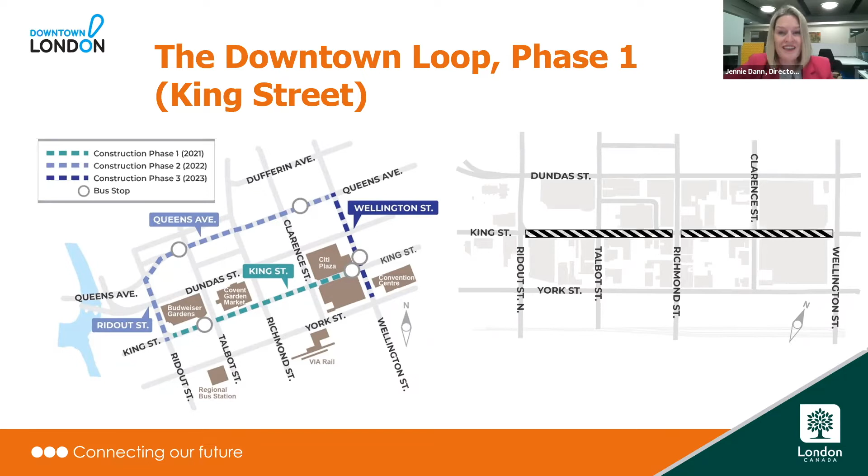The eastern portion of Phase 1 on King Street involves sewer separation work. I think our next slide has some images to help describe that. So what we'll be doing is completing this work between Richmond and Wellington Streets.

It's really important underground work that involves removing century-old combined sewers. That means both the storm and the sanitary sewer are in one pipe, and we'll be separating them into a modern sewer system. Last year, the city completed a significant portion of this downtown sewer work through the Richmond Infrastructure Renewal Project, and this is really a continuation of that effort.

With the intensification happening in the core, this is really important work to get out of the way as quickly as possible. This work will result in a healthier Thames River, increased capacity for development, a reliable sewer system, and an improved streetscape when we've put everything back together.

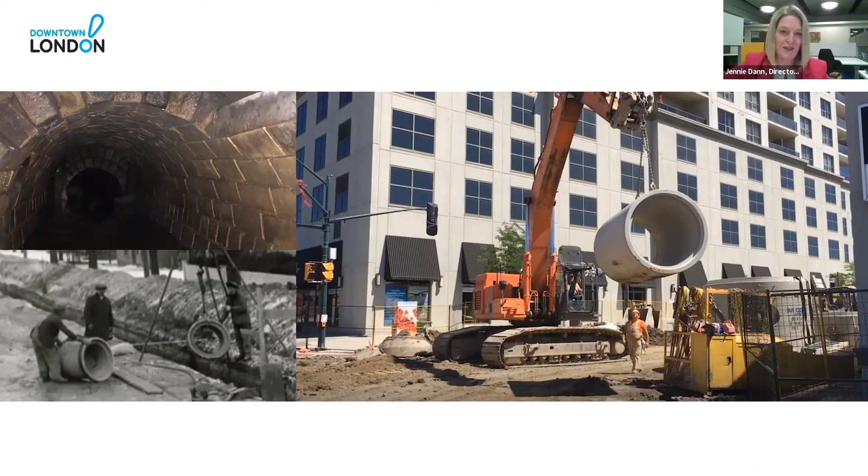This is certainly a major project, and we have put together a great team that will be dedicated to ensuring it runs as smoothly as possible for you. I'll highlight some of the key players who will be involved in this work.

First off, I'd like to welcome our contractor, L82, who will be building the project. Brandon Shaw from L82 is with us today, and I'll ask him to introduce himself and say a few words to you.

Thanks, Jennie. My name is Brandon Shaw, and I will be the project manager for L82 Construction, the contractor on this project. As some of you are aware, we completed the Richmond Street project last year, which involved similar work with the sewer separation. In addition to that, L82 has over 35 years of construction experience in and around the London area. We're well versed with the downtown area, safety, pedestrians, access, all that kind of stuff.

As everyone's aware, COVID is now another problem that we have to deal with. LAD2 has implemented their own COVID-19 policy, which we've shared with the City of London. Things went well last year, and hopefully we can have another successful project this year.

Great, thanks, Brandon. I want to next touch briefly on what the city's core construction program is all about. Before 2018, this program didn't exist. It arose out of an understanding that major work in the core requires heightened attention and collaboration.

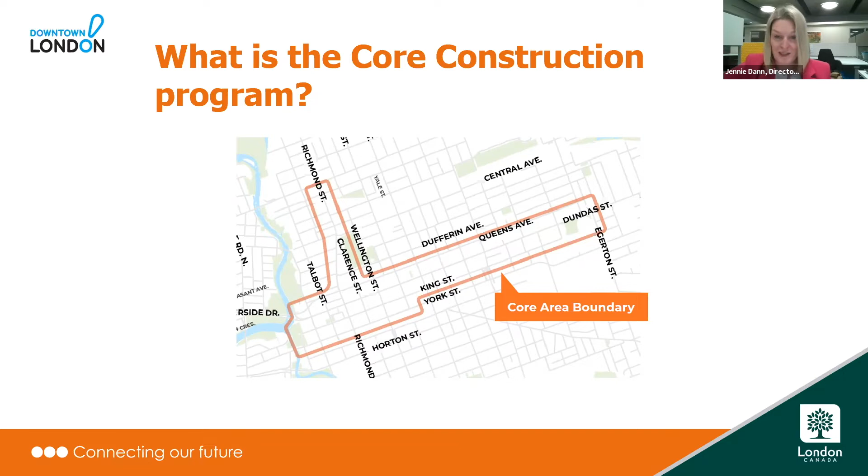In Jaden's previous role with the city as a subdivision ambassador, he has a great deal of relatable experience acting as a liaison between the city and the people that we serve. So we're incredibly grateful for everything that Jim has done, and we look forward to working with Jaden. So I'll now introduce Jaden to introduce himself and say a few words.

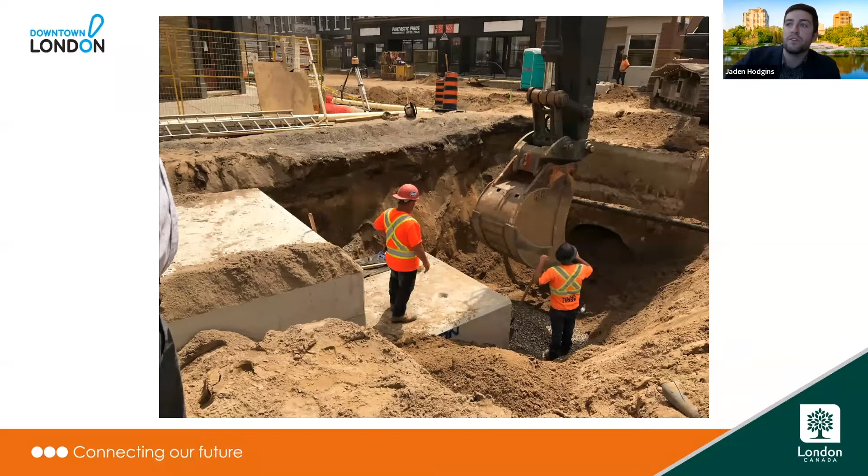I'll give a bit of a construction overview. Work is scheduled to start April 5th. It's anticipated that construction will continue until December 2021, with limited carryover work into spring 2022.

We recognize that more residents may be disrupted by construction noise during COVID-19. Normal working hours will be 7 a.m. to 6 p.m., Monday through Friday. Currently there's no planned night work or weekend work, but the contractor may adjust these hours as needed to take advantage of weather or to catch up on the schedule.

A multi-stage approach will be used to balance efficient construction with transportation impacts, and the schedule takes into account expected average weather conditions and known above and underground site conditions.

Now I'll walk you through the staging of this project. Construction will be split up into the following stages in order to minimize construction impacts. Stage 1A is Talbot Street to Richmond Street. Stage 1B, Ridout Street to Talbot Street. Stage 2A, Richmond Street to Clarence Street. Stage 2B is the Clarence Street intersection.

Stage 3A is east of Clarence to the Citi Plaza parking garage exit, and stage 3B is east of the Citi Plaza parking garage exit to Wellington Street. We have traffic management plans in place to provide alternate routes for vehicles, transit, and cyclists, which you'll see in the next slides.

Construction's planned to commence in April in stages 1A and 2A at the same time. Then we'll be proceeding to stages to the west and east, which I'll show you next. What's important to remember is that the portion from Ridout to Richmond, at stages 1A and 1B, will be maintaining one lane of traffic and loading areas where possible, with short duration closures occurring as required for construction.

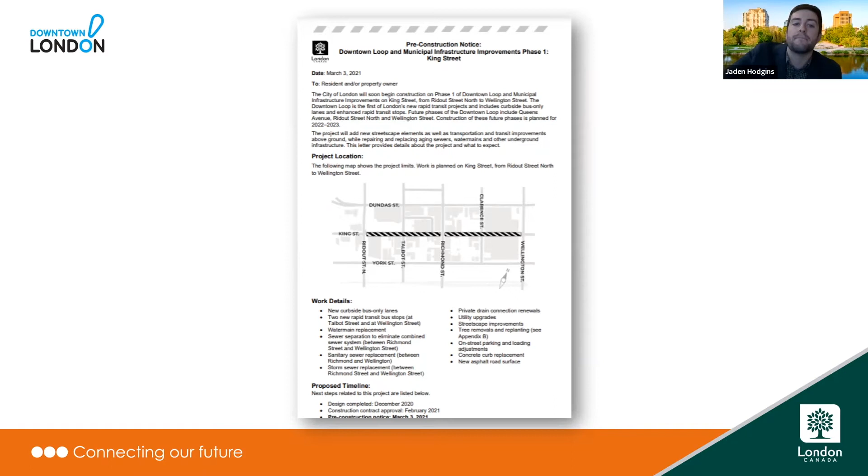Just to touch on some of the COVID-19 precautions, as we progress into construction, I'm sure there'll be a lot of questions about what's happening and where we are with things. The contractor, L82, needs to remain focused on managing their crew and subcontractors, so if you have any questions, please contact me or Jeff rather than the contractor. I'll flag that this is especially important during COVID-19, as we want to make sure we're keeping everyone safe. So contact me rather than tapping on the shoulder of someone at L82, and I'll be happy to answer your questions.

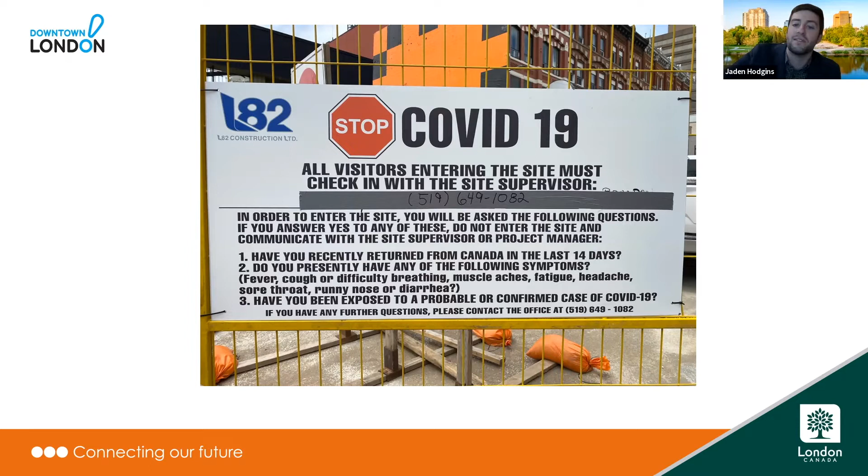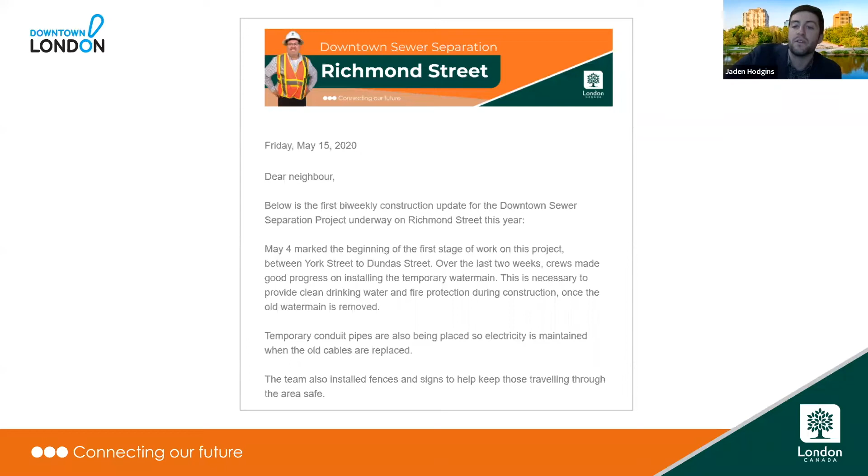Now I'm going to hand it back to Jeff, who's going to take you through some of the things we've learned and adapted and will be applying to this project.

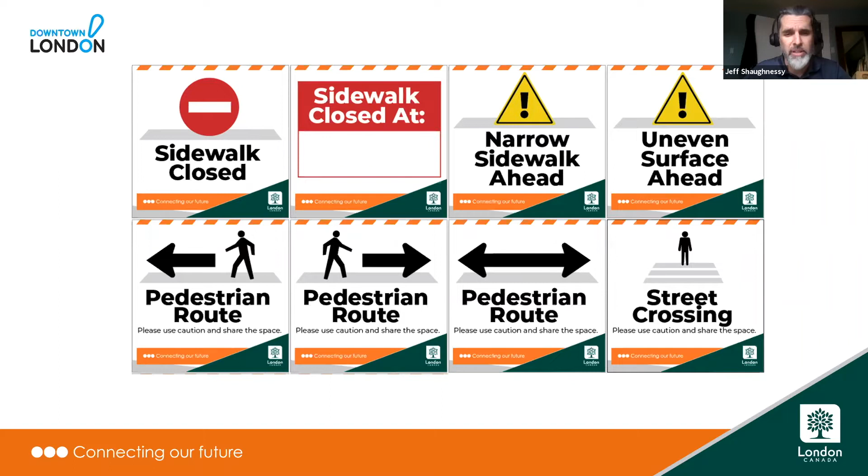We also know that site safety is of the utmost concern. As you are all aware, there are a number of social issues that impact the core, and there are instances in which people who may be suffering mental health or addiction issues could be in distress or having issues that can't be resolved on the spot. We have a coordinated, informed response team available to assist, and you will hear a bit more about that later as well.

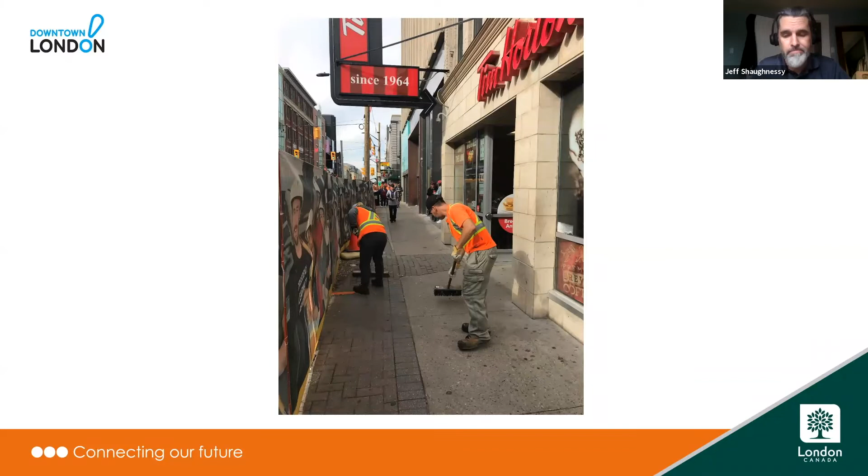We also know there is a huge desire for free parking and other incentives for core area visitors. Parking can get disrupted by construction, and people want to know where to send their customers. So we'll also talk a bit more about that shortly.

We know that there is a need for some special construction-related temporary parking and loading areas. Construction causes dislocations of where people can usually pull up curbside to drop something off quickly, pick something up, or pick somebody up from a store. So we will also talk about that a little bit more later.

There are going to be interruptions. It's important to set that expectation. There are two types of interruptions: planned interruptions, and then there's the unfortunate kind of unplanned interruptions.

Planned interruptions are what we know we have to do in sequence for the project, and we try to let you know as soon as we possibly can. For example, we can't know weeks in advance when the water needs to be turned off, but we typically know at least 48 hours in advance, so we'll be sure to pass that on. Our contractor will put a notice on the main entrance of each business that's affected, and we follow up with each contact on our email list here at the city to confirm receipt of the notice.

For many of you, these service interruptions can be dealt with easily enough when you have advance notice. For others, you may have specific issues related to these interruptions. Do reach out to us if that's the case, and we may be able to help.

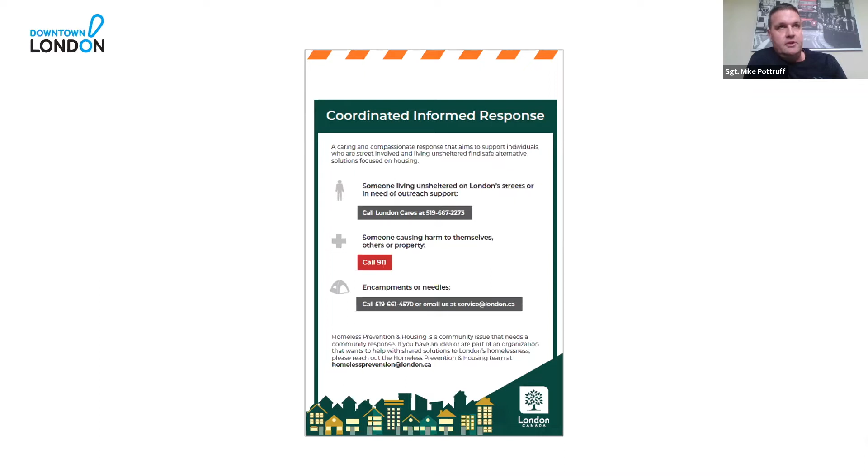A typical foot patrol call - Jeff touched on it a little bit earlier - we'll deal with thefts, maybe if the suspect is still on premises or already gone. We'll deal with trouble with persons calls, quite often trespassing issues, vagrancy issues, which we're seeing a lot in the core right now. Like Jeff said, somebody under the influence of a possible narcotic or alcohol, we deal with that, and someone experiencing mental health issues, we certainly deal with that as well.

You're going to hear from Debbie Kramers from CIR. We work closely with their group to help us out with individuals that maybe aren't committing criminal acts but are downtown and causing us a bit of grief.

For the businesses out there, we do have crime prevention officers whose sole job is crime prevention, and we're more than happy to have them come out and speak to your businesses and offer some crime prevention tips and hardening your business. Things we've recently seen with the project we're running include businesses leaving valuables in front windows, or having cash registers still in the business and on display, possibly with money in them. That's just a lure that a lot of people sometimes can't prevent themselves from breaking in for.

So we encourage that kind of thing, and certainly our crime prevention officers, Constable Carl Noel and Constable Kathy Found, are more than happy to come out and we will do an audit free of charge. I believe that's all I wanted to touch on, Jeff.

Okay, that's great. Thank you very much, Mike. As Sergeant Pottruff mentioned, London Police Services works closely with the city's Coordinated Informed Response team on many social issues in the core when there is a need for intervention. Debbie Kramers is our Coordinated Informed Response manager for homeless prevention, and is here today to tell you a bit more about the program.

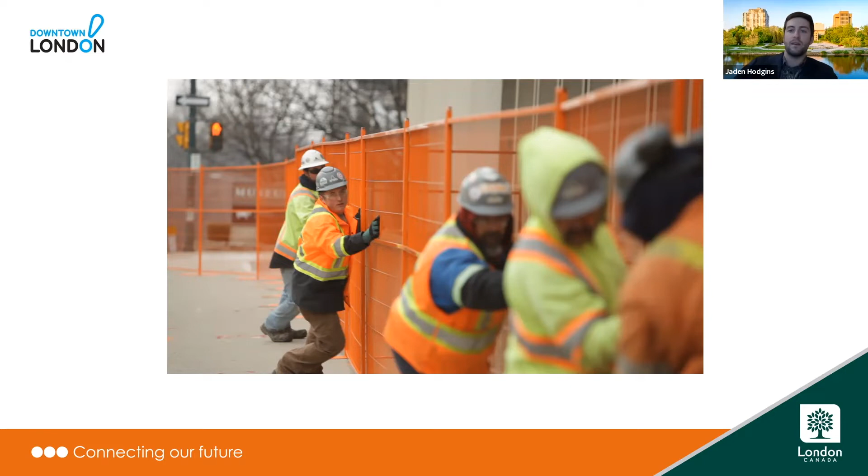Getting into site cleanliness, we recognize that through our past experiences, garbage collection is always a bit of an issue and something that we're paying close attention to. For garbage collection during the project, typically we would ask that properties have their garbage placed out early in the morning, before 7 a.m. if possible.

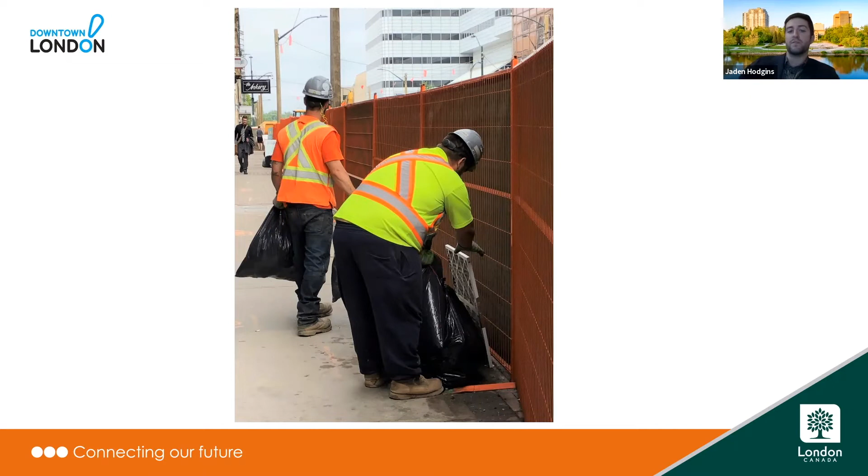Businesses using private garbage collection services will continue as is unless construction requires temporary alternative arrangements to be made. So if you're currently using a private garbage collection service, please make me aware so we can coordinate this. And garbage bins for the public will be available just outside of the construction zone.

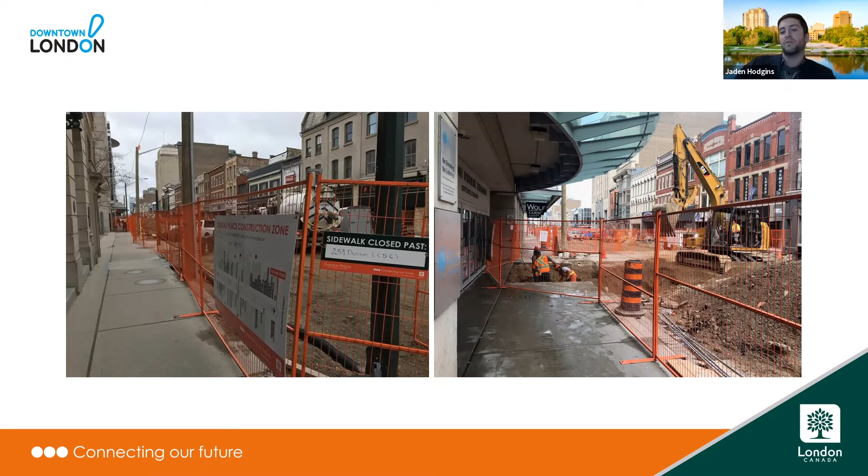Here you can see some of the signs that Jeff showed you earlier in action. We've made these signs larger as well so that they're easier to read. And we also have some COVID-related signage up now to reflect the guidance of our local public health unit.

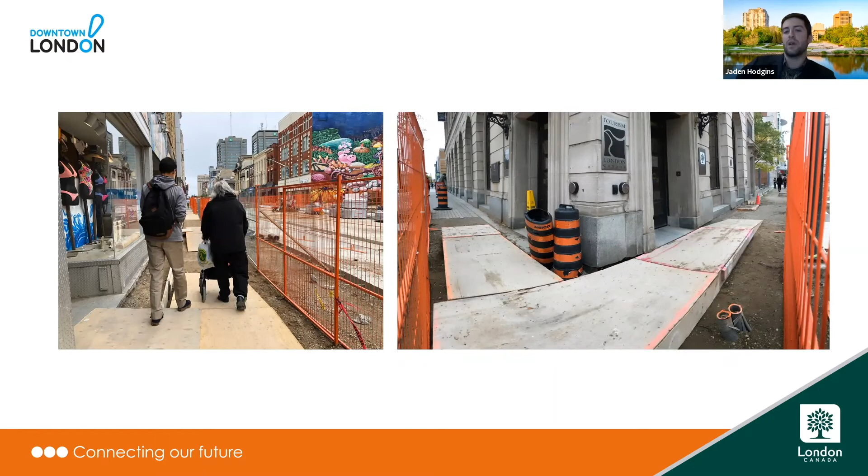Here you can see an example of some of the temporary ramps we've had to use on some of our projects. We do have situations where we can't provide a level or hard surface, so we'll provide temporary ramps just to allow access for people with mobility issues to all the storefronts.

And we want to make you aware that you do have an ability to report an issue you see in the construction zone to the city through our website, through our Service London portal. This gets directed over to our group. So if you don't feel comfortable making a phone call or emailing me directly, you can submit it through the city's website this way.

Thank you very much for that, Jaden. Your slides are a bit of a segue for our next section on accessibility. Melanie Stone is the city's accessibility specialist. There are lots of people in our community who, due to age, infirmity, and injury, whatever it may be, have mobility challenges, and for them, a construction zone presents lots of unexpected terrain and obstacles. We are always trying to be more attentive to what we can do to improve things on our construction sites.

Good evening, everyone. Whenever we have construction, we have significant disruption, which can affect people with a variety of disabilities going through the area. We often talk a lot about physical disability, and that is, of course, very important to focus on. But there are a lot of distractions in construction zones and a disruption of pedestrian sidewalks that impact people with a variety of disabilities, including cognitive, intellectual, and sensory disabilities. And we have learned quite a bit over many construction projects about how to be responsive, thoughtful, careful, and as inclusive as possible through these construction sites.

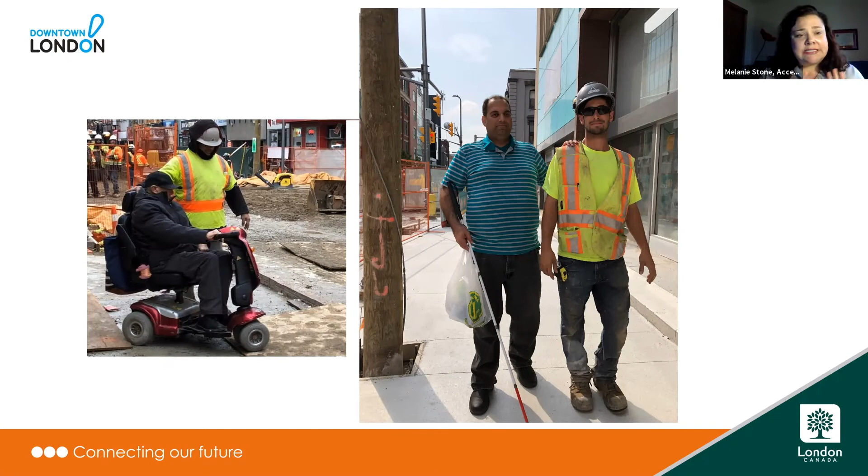I do want to give you a little tip, if you can go to the next slide. One of the things that happens in a construction zone is that people who regularly rely on large signage are pushed a little bit closer to businesses.

So they can't see the sign for your business as clearly. It's often important to put a sign with your contact information, address, or any information people need to navigate to that spot in the window of your business. It really helps, and to put it at a place where somebody seated in a wheelchair can actually see it and engage with it.

I can always be reached at accessibility@london.ca, but the best way to navigate quickly is through Jaden and Jeff, and they'll be in touch with me as well. We need to support each other through this, and I'm happy to be in touch with anyone who wants to problem solve some issues. We need to be on the lookout for one another, for anyone who is becoming disoriented, frustrated, confused, or stuck in a construction site. We all need to help each other.

The city is committed to accessibility, and we will be continuing to work throughout this project to make sure that every access is maintained. We're looking forward to the inclusive conclusion where everything is much more accessible. We just have some short-term difficulties to navigate through. So thank you very much.

Thank you very much, Melanie. Very informative and helpful. One of our goals is to make it as easy as possible for your customers to reach you, and we recognize construction displaces parking.

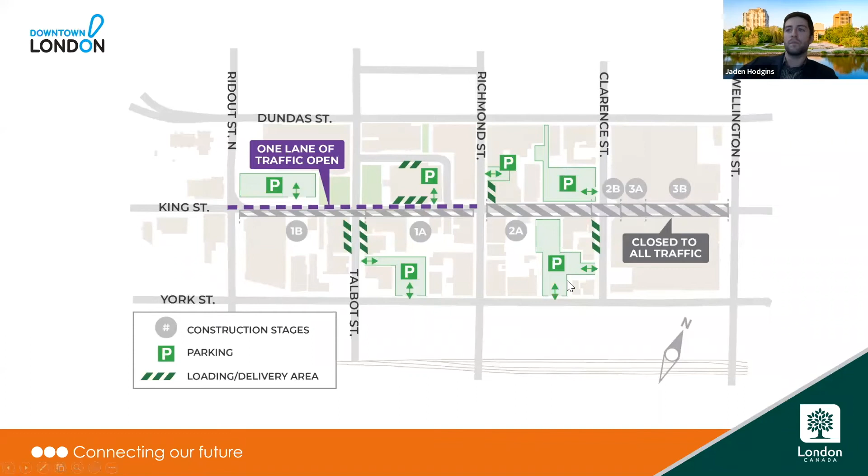So we've just shared with you a whole slew of practical considerations that we'll be applying to this project. Another key part of mitigating construction impacts is communications. Through targeted and strategic communications plans, we're going to be letting London know that King Street and the surrounding area is open for business during construction. That's a really big priority of ours. Colleen Gyori from Downtown London and I will be working together on this, and we're just going to take a couple of minutes to walk you through some of these plans.

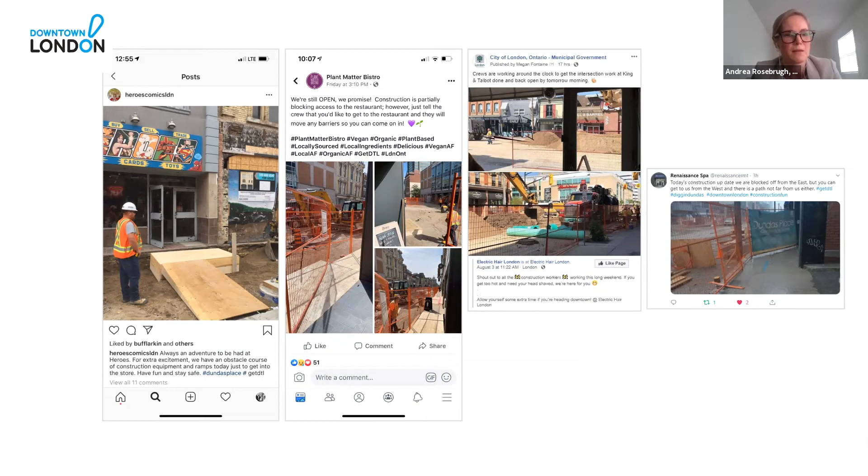Colleen, did you want to add anything here? Yeah, just a really important note that when the construction fences are up, it can be more difficult for customers to see your open sign and know that you're out there, you're open, you're ready for business. So your digital presence is more important than ever during these times. You could post little videos showing how to get there, navigating the construction zone, some fun, bright signage lower down to indicate that you are open and people can see how to get to you. I really encourage you to do those things and stay connected with your customers so that they know construction does not mean businesses are closed during that time. You're here, you're ready. And of course, the BIA will be doing those things as well to help you out. But again, any extra ideas, if you need support enhancing your digital presence during this time, just reach out. We're here to help.

In addition to social media, we'll be looking into different advertising opportunities. We'll be bringing back some of the fun signage to promote the area. We've seen lots of traction with that over the years, and we'll be looking for strategic locations to promote coming to the downtown. The only other thing I can add is that if you have any other ideas of how we can help folks navigate through the construction zone, any fun signage ideas, please reach out. We want you to feel represented in this marketing and in the signage. So if you have any fun ideas, let us know.

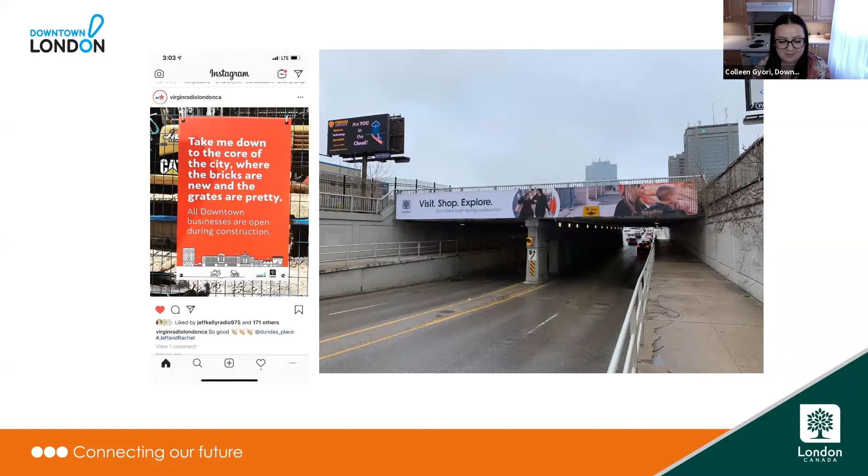Along the way, there will be lots of opportunities to get involved. In past years, we've had pop-up signage installations, and businesses have participated in radio ads with us. So keep those ideas flowing into the BIA, and we can all work together to make the space really

As Andrea mentioned, we are actually going to be visiting each of you in the construction zone. Barb is going to pop by and chat with you and drop these cards off. But if you're looking at them and you're not sure who to contact, just call the BIA. We'll either tell you who to talk to or we'll give them a call for you.

Another resource we introduced in the past two years is the construction toolkit. Some of you will be familiar with this. A digital copy will be available online at the start of the construction season, and we'll be giving hard copies out to the BIAs as well for them to distribute. This document really contains all the info you need about construction - info on the schedule, what the contractor will be doing on site in terms of garbage collection, site safety and cleanliness, and traffic management.

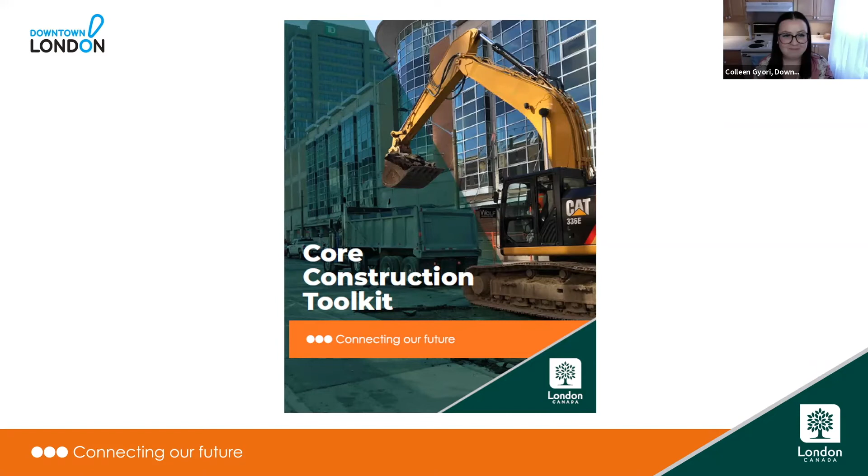Here's just some more of what you can see inside of the toolkit, to give you a sense of that. Just some reminders here of how to stay informed and engaged throughout the project. The Get Involved site is a page where you can find important project info and construction resources, including the last email updates from Jaden and Jeff - those will be linked on here. We'll also be supporting the BIA's social media efforts to promote the area, really just trying to amplify those messages.

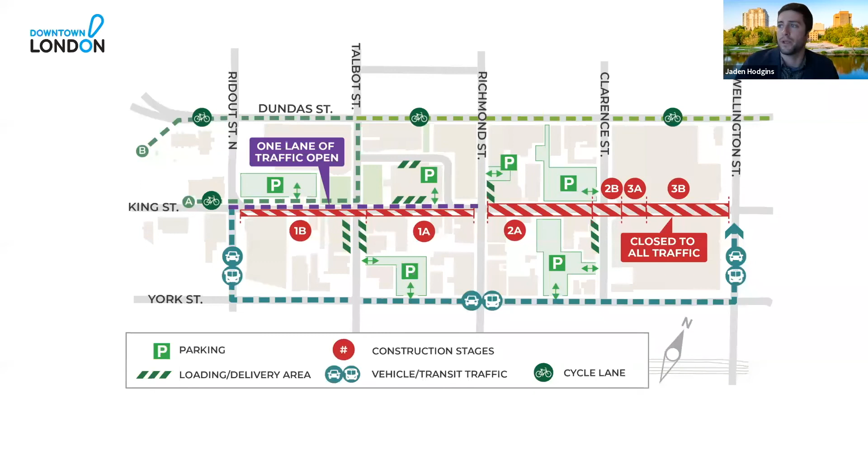Okay, sounds good. I'm going to pull that up. I also see a question about, can we also get a copy of this traffic parking map? Absolutely, we will circulate.

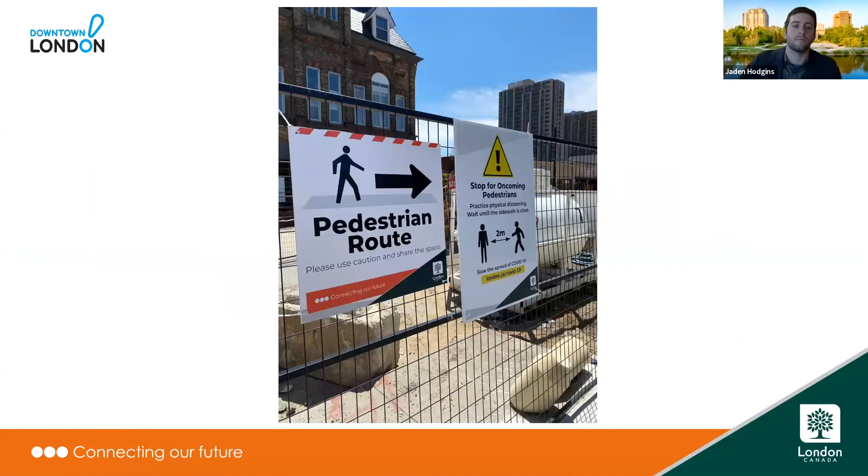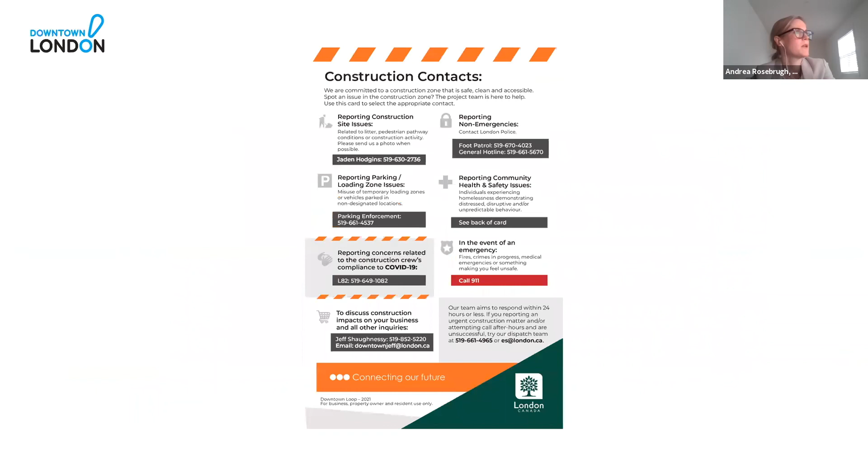I think we have a spot where we've got both of these. I may have gone past it. Sorry to flip these so quickly, but I'll just try to find where we've got both of them next to one another. There you go. Is this the one you're looking for, Jaden?

Yeah, I think it'd be great to get some print copies of those and get them out in business hands so they have that quick reference. Yeah, absolutely.

One of the things we've done in past on the Old East Village project, speaking to the point around the parking maps, they are helpful to be able to help folks navigate to find you. So we provided electronic copies of those for businesses to be able to identify their specific business, like 'we are here.' That's something we can offer if that's helpful at any point. We can specify it too if there's a particular closure happening, so really just those enhanced graphics that make it easy for you to share that info with your visitors and customers. We're happy to provide those.

As part of the navigational signage around the area, we have pedestrian navigation signs that are kind of a master one with a business directory. I'm sorry we don't have the one finished just yet, it's almost there. We'll have it ready for construction, but anyone approaching the intersection of Richmond and King would be able to see on both sides what businesses are located where and how to reach them. It's kind of whiteboard finished, so you can wipe it down as we've got pedestrian closures, and just really help people navigate to find you. It lists all the businesses, so it's another thing we've found helpful in the past.

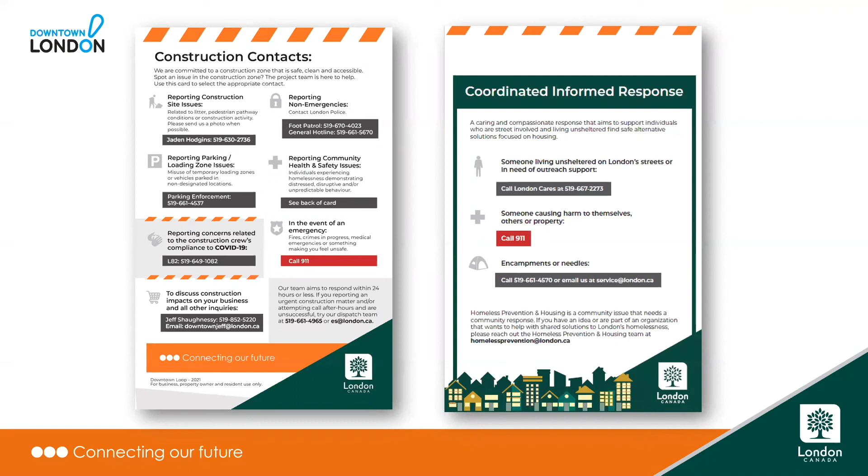Is that question related to cameras during construction? I think many of the intersections and some downtown locations already have security cameras monitored by corporate security, so there is some monitoring happening anyway. I know they keep an eye out when they know there's activity happening. Some of those cameras are motion sensored, so at the security monitoring office they would see something come up if there's activity at a certain location. As far as response, I think they know who to coordinate and connect to. I don't want to speak without knowing all the details, but I know there is some existing monitoring happening.

Jenny, one of the neat components that maybe not everyone's aware of is the community employment benefit. Did you want to talk about that while we've got a bit of a lull here? Sure, it's not construction related, so we didn't include it in the formal presentation.

But one of the exciting things about this project is that we've incorporated a community employment benefits framework as part of the contract. It's actually a requirement of our federal funding that we try to find ways to have labor invested in this project go into benefiting the local community in which the infrastructure is being constructed. So we have a program and even an allowance within the contract to have the contractor work with local community groups and employment agencies to help place people in equity seeking and sometimes underrepresented employment groups - everything from veterans, people with disabilities, women, First Nations, apprentices, youth. There's a list of about 8 different targeted groups by the federal government that we're trying to find opportunities for through these contracts.

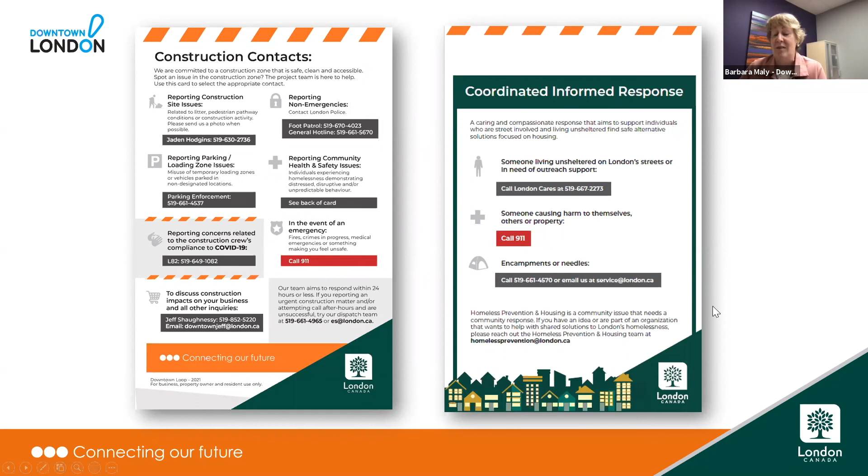Jeff and I will be out delivering materials in the coming week or so, and so we'll see you there. But thank you very much to all the city staff and the team in general, just for providing this information to our merchants. It's important work, we recognize that's being done, and we look forward to when we're on the other side of that. So thank you very much everyone, have a good evening.